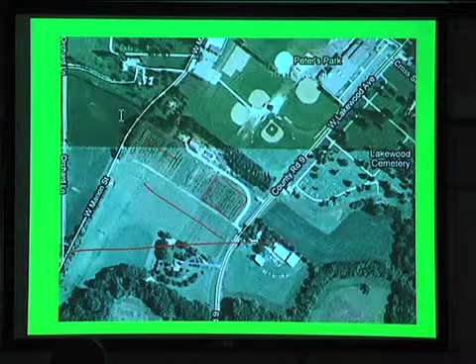Our farm - the city limits run across like this. This is what we planted, and that's what you saw in the first chart. We planted 1,000 the first year, and subsequently we've planted here and here. Some of them are just a year or two old, with their heads barely above the grass, and some now are 7-8 feet high and strutting their stuff, so to speak. I'll show you some pictures.

We built a machine shed, a shop, a root cellar, and a greenhouse - a high-end earth berm greenhouse with what we're calling seasonal thermal energy storage, using a not-so-efficient process of blowing heated air out into insulated storage. I've got a couple of schematics later to show you what we did. We didn't even have the building up yet, and I bought a tractor and some accessories - I've always been a bit of a tool freak. The building was scarcely up, and I bought a skid steer and some accessories. My wife figured out this was not about hazelnuts, this was about tools. But she adapted really well.

So the reason we got interested in hazelnuts goes back probably 30, 35 years ago. I heard a presentation about woody agriculture and how it could address some climate change problems by sequestering carbon. Rather than having annual crops, we could have woody crops that put carbon in the ground, in the root systems, and in the leaves that are dropped and processed by soil organisms.

We were on vacation, and my wife brought along a book a friend had given us. She'd already read it, hadn't said much about it. We got down to the resort and she said, 'You better read this - it'll ruin a vacation.' It's a very good book, updated since, and I recommend it to everybody. Because if you don't read this and some of the other books on a card I'll pass around later, frankly, you don't know what's going on unless you're looking beyond the broadcast media, the conventional print media, and so on - because they really don't want to deal with it, and neither do our legislators at a local, state, or federal level.

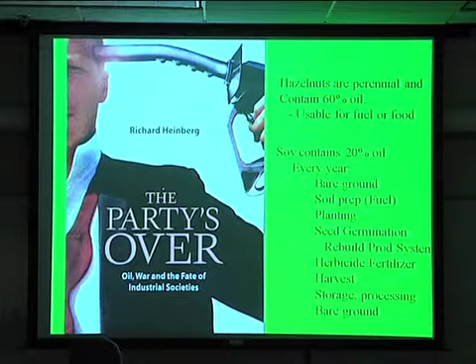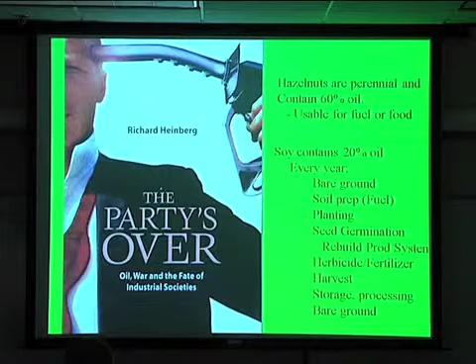So anyway, we got interested in hazelnuts because they're 60% oil and because they're perennial. It's a high value oil and high value protein, rich in nutrients. Soy only contains about 20% oil, and every year you go through a bare ground cycle—soil prepping, planting, germinating a seed, building a root system and the above ground production system, putting on fertilizers and herbicides, harvest, storage, and all that. A lot of input for 20% oil.

The thing that soy has going for it is that the genetics are really refined and everything ripens at the same time. The beans are all about the same shape. The pods are consistent for husking purposes and so on.

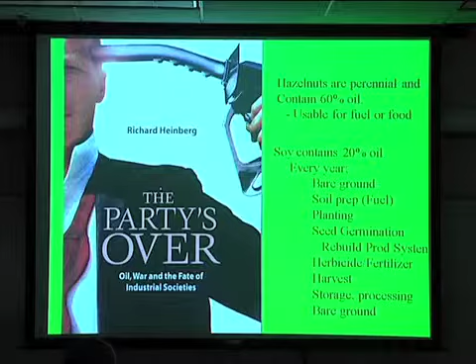Where hazelnuts have a lot of diversity, yet they grow in Minnesota. There's hazelnuts growing in Oregon that are European hazels—they flower there in December and January. They don't do real well here in Minnesota. Ours flowered this year in March because it was a little warm; ordinarily it would be early April. They are air pollinated, as you probably guessed.

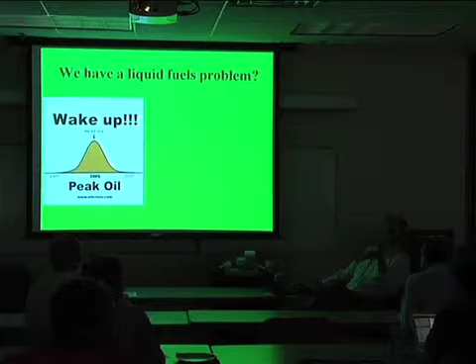Okay, so we got a liquid fuels problem. This is one of the minor digressions here. In a couple 100-year oil usage cycle, we're at about the midpoint, maybe slightly past—you could debate it, but we're at about the midpoint. The easy stuff is on the left, the more difficult, more expensive stuff is on the right. There's a reason we're 150 miles out in ultra deep water trying to get oil. It's because we're getting desperate.

And then, given some success in developing processing equipment—because there wasn't processing equipment for these nuts due to the diversity in size and shape—I developed a nut cracker that'll handle anything from a quarter-inch hazelnut up to a 1 3/4-inch black walnut, and a sizer sorter so you can sort them into size classes and then run them through the cracker based on their size class.

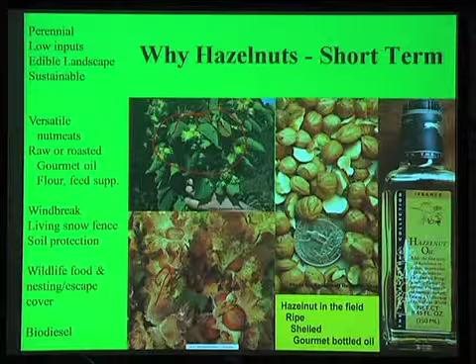The hazels are rated as a heart-healthy food by the FDA because of the high unsaturated fats. It's used in a lot of products—you may or may not have noticed, but Nescafe has a hazelnut coffee. You've seen those holiday chocolates. We have an organic chocolate French nugget that's produced up in the Twin Cities.

I sent him an email a while back. I said, basically the French should be embarrassed by French nugget having peanuts or something in it—I mean, they don't use peanuts in Europe, they use hazelnut. I told them I was going to have hazelnuts available to them later this year.

You'd get true French. Anyway, if I had 1,200 pounds of kernels sitting on a pallet, a market would be ice cream. That's the kind of quantities an ice cream maker buys for making a run of ice cream—somebody like Kemp's.

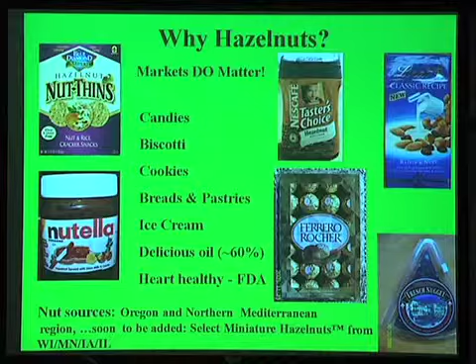There's a lot of interest. I get emails from up here in the Twin Cities from some of the restaurants, especially those interested in local foods. They would like to source hazelnuts and hazelnut oil from within the state. And so that's my objective, is to make them happy this fall.

So anyway, they can be sold in shell, or as nut meats. If you buy them in the grocery store, they're somewhere between $10 and $14 a pound, typically sold in 2-ounce or 4-ounce packets. You can find oil anywhere from 50 cents an ounce up to $7 an ounce. In fact, I just saw one that's almost $14 an ounce. It's about packaging, guys—the bottle's pretty, and some French word that most folks don't understand. They think it means it's really great.

So anyway, there's lots of possibilities for the product in pharmaceuticals. There's been some testing done of the husks. The husks protect the nut during development, and they have chemicals on them to make them unhealthy or unpalatable for insects, or for deer, for that matter. I tried biting one of those green husks last summer, and I wanted to toothbrush the inside of my mouth, the skin part, because it's really bitter, really astringent.

But anyway, there's Taxol that's been found in some of these husks. So we can see down the road that they may be grown for biochemical purposes through some genetic selection. It could be used for fuel, for mulch, for on-farm biodiesel, and so on. The biggest problem today is there isn't sufficient volume. You know, the old argument—you need a market, which has to be there first, market or product. Well, you've got to kind of grow both. And so that's where we are, in the pioneering stages, so to speak.

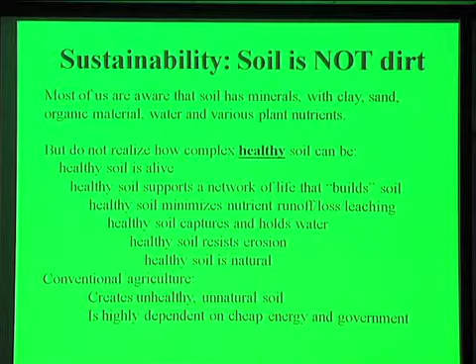It's been said for decades that modern agriculture is a process of using oil, changing oil into food. And when the energy supplies begin to go south, as they're about to go, we get food problems. Right now, grain stores worldwide are at record low levels. We're on the edge of some real problems. Folks don't know that, but probably people pick up the undercurrent of it.

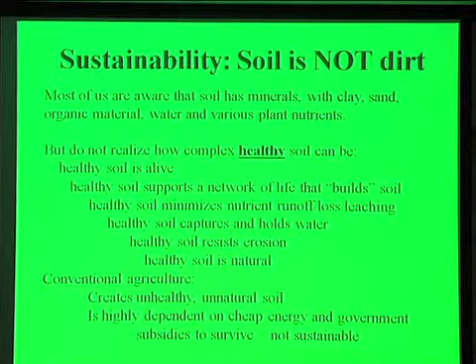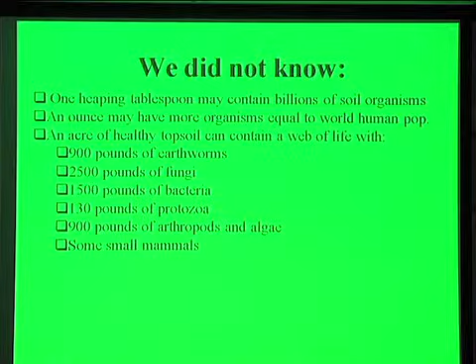It's unbelievable the number of community gardens that are firing up, gardens showing up in backyards, and garden programs at schools getting into gardening on school property. So there's lots of change in the wind, and some of it isn't explicitly about oil descent or energy descent, but it's related. These are things we didn't know about soil—an ounce of soil can have more organisms living in it than there are people on the planet at this moment. It's unbelievable what healthy soil has in it compared to the dirt that most of our crops are grown in.

And, you know, you go out in the landscape here, and most of the farmers, if they had to eat what they grow, would starve to death. Because they grow corn and beans, and it's not great corn for food, and it's not great soybeans for the table—those are industrial inputs. It's really not food per se that you'd want to serve your family.

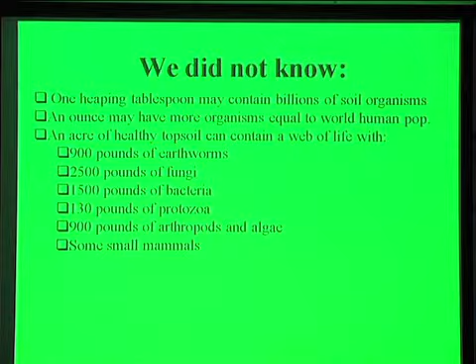So, a short history: we bought the land in 2003. We subsoiled, rototilled, and so on. We put in 1,000 seedlings in 2004, and lost about a fourth of them. We made some frantic protective efforts—fence posts in the ground in August when the ground was hard as rock—and circled it with netting to keep the deer out.

We went right through it and paid no attention to the hazels, so we pulled the stakes out the next year because it seemed like it was ultimately a waste of time. We mulched everything and ran a clean field—no deciduous seedling likes competition for water, sunlight, or moisture. So we found a local source of wood chips and mulched everything. We put in a fertilizer tablet, and hydrogel to hold moisture because we're in a floodplain, a 500-year floodplain. It's kind of a sandy loam soil.

Next year, we machine planted 3,000 tree tubelings, and there was 90-plus degree temperatures and a 15, 20 mile an hour wind, and they were scorched by sunset. A lot of them died, probably 60%.

In the next couple of years, we did replanting. We injected mycorrhizal fungi spores next to every seedling. My wife did that, gave them each a 5-second shot of a liquid with some fungal spores, because the spores attach to the roots and increase greatly the amount of contact area between the roots and the soil.

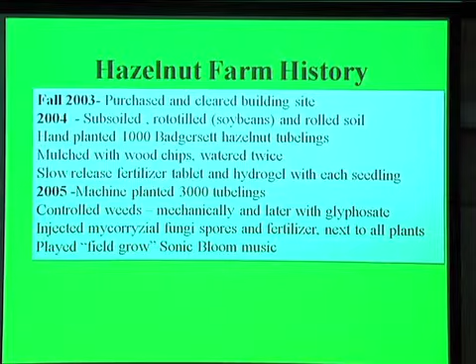We have had remarkable success with our planting, and so we get a lot of people back every year to see if it's keeping on. I'll show you some pictures of what's out there today.

We've done replacements. We decided that the soil wasn't too good and we should upgrade it, so we planted some manure crops. We tried winter rye, which didn't look like it was doing too good in the fall. When we planted it in the spring, it was kind of spotty looking, and it seemed like in the time I turned around three times, it was three foot high, turned into straw and headed out, and it was just a total mess. You've got to get it under the ground, and of course there were seedlings this high in them, which you couldn't see from the tractor. So we spent a couple of weeks cleaning that mess up.

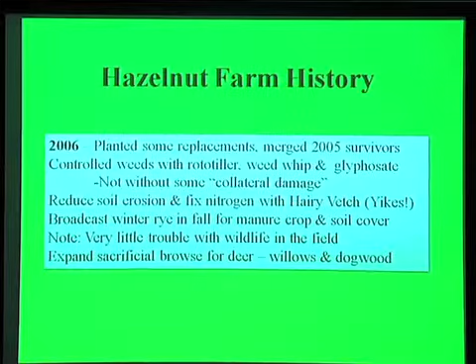We put in hairy vetch because it was recommended by a seed house. It turns out that it's no better than crown vetch, and it went right over the top of the seedlings. We're trying to shoot the hairy vetch, and it was taking out our hazelnuts as kind of collateral damage, as they say. So we had some really fun experiences, that's the fun part.

My wish is that if I had a choice about life, it would be that we'd get to live it twice, once to get the experience and then once to do it right. This is about everything that we do, the whole farm is a big experiment.

One of the things that we did was put in some willows and dogwoods, the idea being sacrificial browse, because we do know some people who, because of where their plantings are and because of some deer yarding in the area, have had a lot of problems with deer browsing, deer pruning their seedlings.

We put in some what are called Austrees, a hybrid willow that does not propagate, doesn't seed, and doesn't sucker. We just take cuttings off of them and propagate them on the property, then have a small tree planter and we're moving them out around the edge. The idea being that when the deer get to the field, they know what willows are and they know what dogwoods are, and they munch on them and get to the hazel and figure it's not food fit for a deer, because it really is not too tasty.

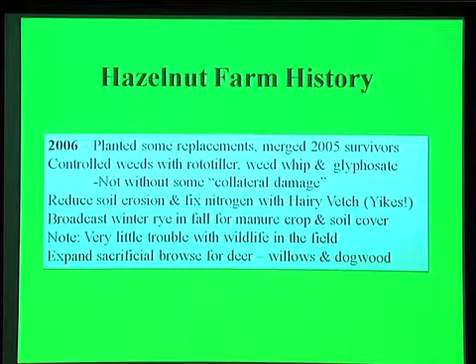In 2007, we were doing replacement work. We put up some raptor perches for hawks to sit on and hunt from. We harvested 13 pounds of nuts.

Well, this is pretty good, we didn't have to crack many. We didn't have any equipment, you know, so when you're cracking by hand, not many is good.

The next year we harvested about 125 pounds, and my best bush in the second year filled a 25-pound onion sack off the bush. The third year we picked about 900 pounds, and a lot of bushes are only this big yet. Our best bush in the third year filled a 100-pound onion sack. There's a lot of diversity in the bush sizes and in the bush production and in the cluster sizes and nut sizes. I'll show you some pictures of all that stuff in a little bit.

In 2009, we started working on the solar domestic hot water system. We put in one 4x8 panel, and I got way too much storage.

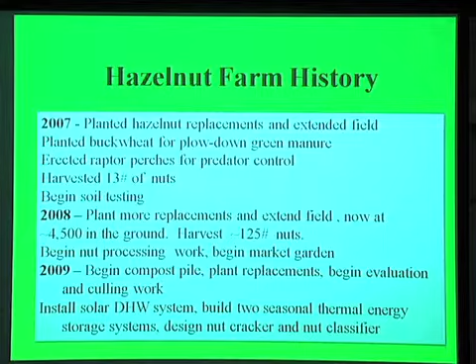I got a 120-gallon tank, but because I had it from the olden days, and I had the solar panel from the olden days, I said, well, I better use it. So I bought a little 20-watt panel and a little March DC pump and just wired them together. So when the sun shines, it collects. It's really super simple. I didn't put a controller in there. And so then in 2010, we got into developing some equipment, patent application kind of stuff.

I still have to do some wiring for the energy controls on the ventilation system for the seasonal thermal energy storage. We've done soil testing, we're doing mineral balancing. I still haven't finished the wiring in the root cellar. It's really dark in there without lights.

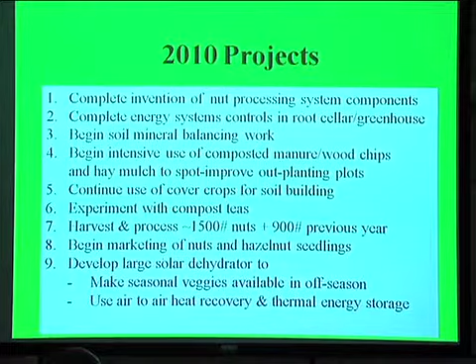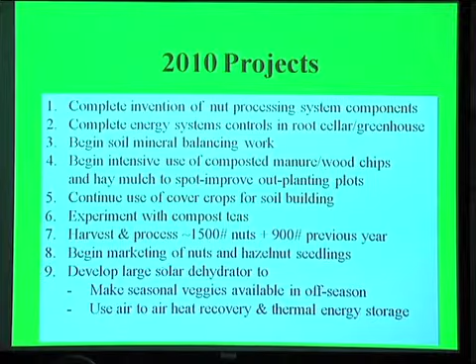And we've done composting. I'm a barn cleaner, I get free manure. It's worth it, it's good stuff. You can't believe what a difference it's made in some sandy spots fast. We're playing around with some compost teas.

I'm going to the farmer's market and selling hazelnut bushes, not many yet, because people say, well, what is a hazelnut bush to start with? Do they grow in Minnesota? People just don't know unless they're about my age. I'm pushing 70, I ate them when I was a kid. People my age remember eating them when they were kids. Kids don't remember that, and neither do their parents, frankly.

One of the projects I'm starting to feel a little pressure on is a solar dehydrator. Last year we had hundreds of pounds of tomatoes and ended up tilling a lot of them into the ground, we just couldn't keep up. So the idea of the solar dehydrator is to take seasonal foods and dry them so they're available in the off-season. We could sell them at the farmer's market during the wintertime. Dried tomatoes are really great, and there's a lot of other things that come out of the garden that can be dried.

The idea is to use an air-to-air heat exchanger that I've got in there to exhaust the high humidity air and bring in outside air, cooler, preheat it, and use the solar thermal energy storage system that's out there with 8 panels on it as a heat source. It'll heat it all, or heat it partially, I don't know yet, because it's all an experiment.

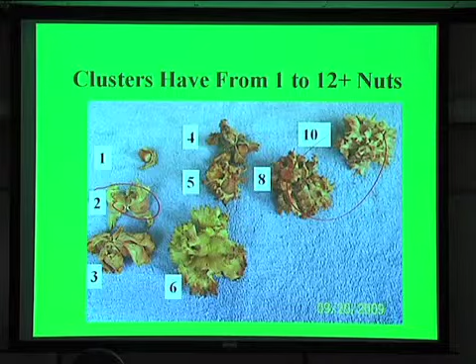Clusters can have anywhere from 1 to 12, 14 nuts. They tend to be larger nuts in the smaller cluster and smaller nuts in the larger cluster. But when you crack them out and aggregate the nut meat, the volume of nut meat is higher in the larger cluster, and the amount of oil there would be higher in the larger cluster. So to my mind, the ideal is going to be somewhere between 6 and 8. It's a pretty nice sized nut, and there's quite a lot of them in there.

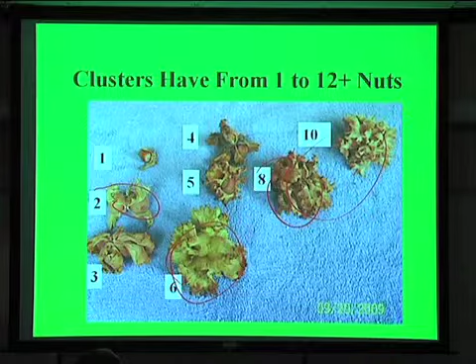I got a picture of a bush I just took the other day, I'll show you. When they're cracked out, you can see there's quite a bit of variability in the shape of the nut, the shape of the kernel, the thickness of the shell, and the uniformity of the thickness of the shell. Some of the nuts have a fairly thick coating on the nut meat, called a pellicle, and it's considered undesirable. Hazelnuts that come out of Oregon, which is the only place they're really grown commercially in this country, they blanch the nuts and tumble them to get that pellicle off, because it's sometimes a little bit bitter.

Ours, the majority of the nuts have a pellicle that's just about invisible, or it stays attached to the shell. We call these select miniature hazelnuts, and you don't even have to break them up to put them in a muffin, a bread, or a cookie. They're pre-sized off the bush. You see, we turn a disadvantage into an advantage.

We also find that some bushes produce nuts that don't fill, and those die. Every fall, when we start looking at harvest time, we go through and look at every bush, crack out 10 nuts if it looks like it might be a decent bush, and make sure they're filling.

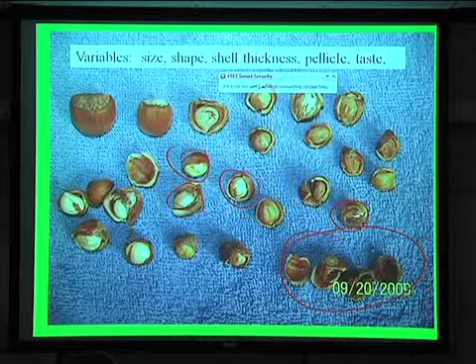And taste them to see that they're not bitter, and see what the pellicle looks like. Every year we're deleting some of them to get those genetics out of the pollen mix. So we go through later, and they're flagged with a yellow flag.

I cut their heads off, put a little herbicide on the cut stems, and we put in replacements. Yeah, we keep track of where the bushes are, what row and how many feet into the row they are. There's a lot of fiddling around.

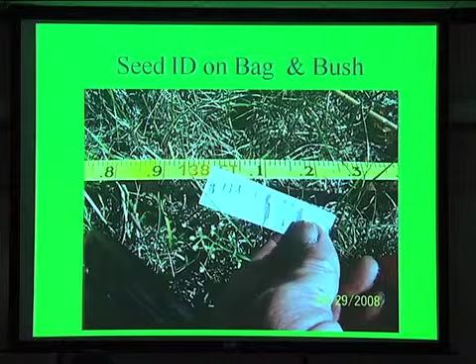And when it's flowering, as it was this year in March, there's just a little bit of pink fuzz sticking out the end. You got to get about 1 foot away to see it. And it's receptive for some weeks.

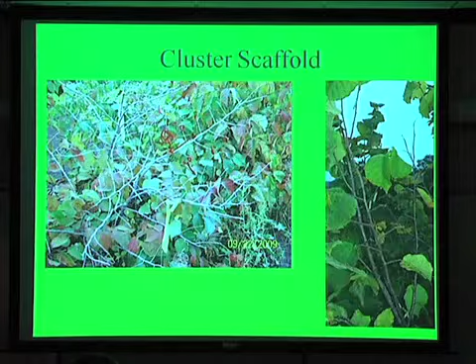They're pretty incredible. They don't all do that — some of them do that and kill themselves making the effort, and they die. If they don't come back the next year with a crop, then we really don't want them in the field. They can't do what they're out there to do. Bushes that only produce 1, 2, or 3 nut clusters think they're out there to make wood. That's not the deal, and they disappear from the landscape out there.

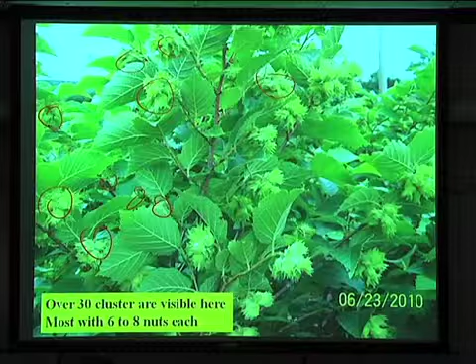Frankly, most of them are still in the shell because we didn't have the equipment. So now we've got the equipment pretty well along. I got a little tweaking to do with the sizer sorter, and then we'll submit a patent. So, you know, necessity being the mother of you know what.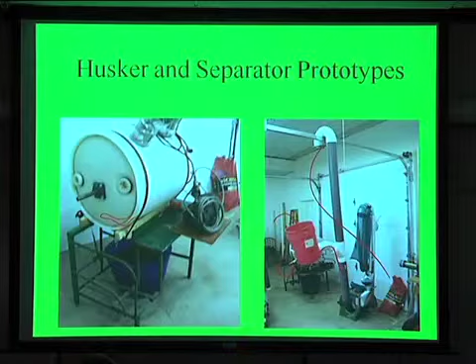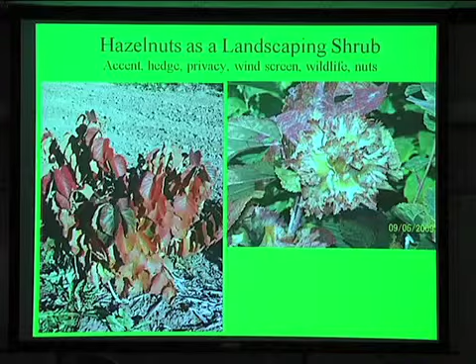This is a bush in the fall. It can be attractive in the landscape as a landscaping element. I've had a lot of tours. The garden club came last summer, and they were far more interested in the husks than they were in the nuts, as a flower arranging element. Some of them are really pretty, and they look like flowers, literally. Some of them have husks that don't quite cover the nut, and some have husks that go an inch past the nut. They have real frilly edges, and they're just a delight to look at. Who knows, they may be in your flower shop next year.

So that's the greenhouse. It's about 60 feet of glass by 16 feet deep. The actual greenhouse this way is 28 feet. It's earth bermed in the back about 6 feet, and we're in the process right now of insulating the front with a couple inches of foam. This is an old Revere panel, a 4x8 panel, and a 20-watt PV panel.

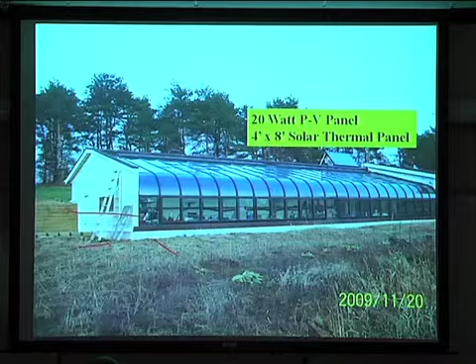Whose window product, whose glass? That was Solarium by... the name will come to me.

This happens more and more often as you get older. It'll come back. Anyway... Write some notes down so you can answer those questions. I won't forget that one. No, it's a good thing to do. My husband and I talk about it all the time. Memory enhancer, write it down. I always tell my wife, watch, I'm writing it down. She says, that does not work. You gotta use the other hand. It's write only.

Write only storage. So anyway, what we have in the greenhouse that's still not quite done is a 20-foot double-walled culvert that goes out into the storage. This is all earth under here, and there's about 300 55-gallon barrels, actually about 325, and they run the length of the greenhouse this way. This pipe, these heat exchanger tubes, are a bunch of 4-inch PVC pipes that run the length of the greenhouse. I put them out going this way just for schematic purposes, but they run the length of the greenhouse and go out of this header here, and then at the far end they turn, go down, and come back alongside the bottoms of the barrels.

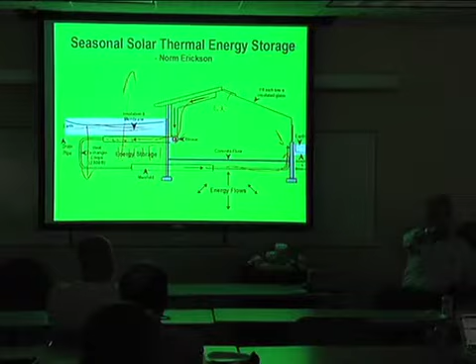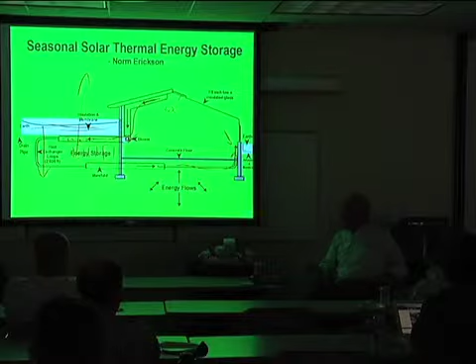So anyway, the idea here is that we've got insulation over this storage. People say, you're crazy, how can you store energy in the ground when it's 50 degrees? Well, it's only 50 degrees because it sees winter temperatures and summer temperatures, and what you're seeing is soil temperature in the well water, or 6 feet down or whatever - it just reflects the average annual ambient temperature. You ask the coal miner or these guys looking at oil coming out of this hole in the Gulf, and that stuff is hot - hundreds of degrees for oil. They're drilling now where metallurgy is becoming a problem with the drilling bits because of the heat. And the coal miners suffer from really high temperatures too in the deeper mines. So anyway, that's the idea there.

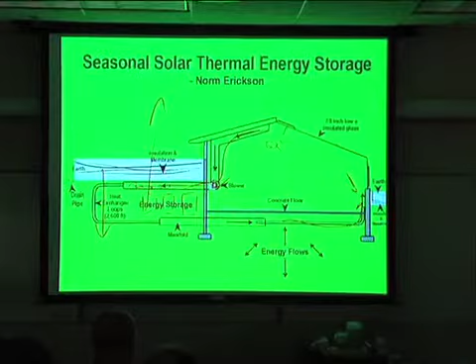Are those barrels filled? Those barrels are filled with water. They were dipped to give a little expansion space in there, and I put new bungs in them. They're all sealed and individually standing in there. I let one sit out on the ground over winter to see what would happen, and its cheeks got real big and it tipped over, but when the ice thawed, it went back to its original shape - it didn't hurt it. These are all high-density polyethylene, and they were used in a food processor. They buy their disinfectants and oxidizers and stuff like that in them. The first ones I got were 30-gallon drums from the Prairie Island nuclear plant.

I use them for lighting. No, they were listed on MnTAP. If you're familiar with MnTAP and the Materials Exchange, there's a lot of free stuff there, including these high-density barrels. I went up to Rogers one time and picked up about 60 of them. Why did you decide on 300 of them?

If I had my druthers, what I would do if I was to do it again would be to go out in the back and dig a hole behind the greenhouse and put the barrels two high, so that I don't have so much area to insulate between the ambient and the storage area, because I have pretty significant heat loss from that, even though the barrels are down 4 feet, and even though I've got a few inches of foam insulation and a couple layers of plastic to keep rainwater from perking through and stealing energy.

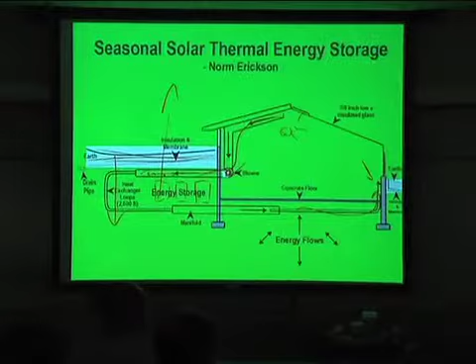So anyway, theoretically, I got energy storage under the greenhouse, behind the greenhouse, and in the bermed area, and to some lesser degree, there will be out here too.

Another question: what's your outlet temperature? It varies with storage temperature. So right now it's about 80 degrees.

So my biggest concern with this when we started was season extension. I mean, in February it can be 0 out or below, and it'll be up to 80, 85 degrees in here. So I can tuck some of that away, and I can keep the greenhouse from freezing. I can keep it easily warm enough to grow greens in there.

You can't get it to a tomato-growing kind of temperature in there, but you can grow vegetables. A lot of them are cool weather crop things. I grow cabbage in there, I could grow broccoli, I grow lettuce, other kinds of greens, chard and so on. It never freezes in there, even when the system isn't running. It is double 7/8 insulated glass.

And this is inside the greenhouse. We were laying pipes in the floor. When the air comes back under the floor, I only had, you know, 10 foot inside and 10 foot outside, because I had to header off lines here, and I headed off lines off the end. So I had to kind of split it.

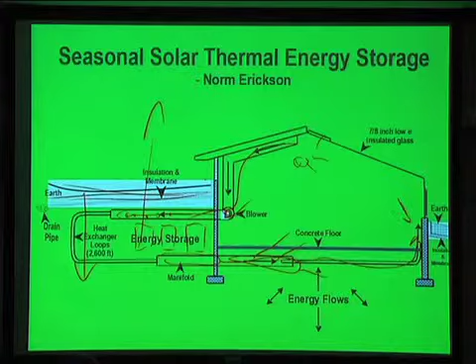So that's what you see here, on the inside of the greenhouse where we start to header off. I bring a pipe up every 6 feet. At the far end of the greenhouse over here, there's like a little apartment we built. It's about 13, 14 feet. There's a bathroom and a shower and a kitchen and a sleeping deck up above the bathroom and so on. So we go from Rochester up to the farm, and we can hang out for some days and be comfortable.

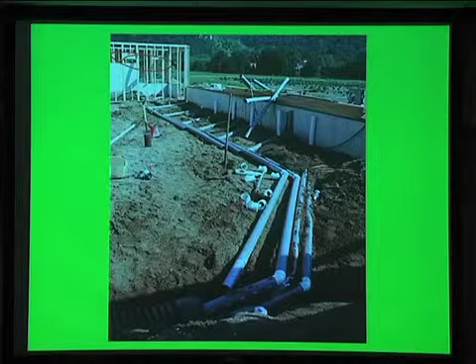There's a second energy system on the place, and these are Solar King panels that got a second life. I had them in a house in a former life. And when they re-roofed it, they got set aside, and some of them were damaged. And I did some experimenting back then too.

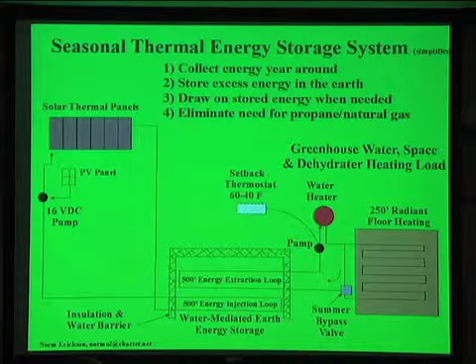These were not designed for drain back, but I tried it anyway, and I had some pillowing. If you remember the Solar King panels, they were like a waffle-looking pattern. They were glued together somehow, and then they used nitrogen high pressure to expand it. So it's an extremely efficient panel, very thick copper, and top rated. But it won't work so good in our weather with drain back.

So anyway, I had them, so we spent some time fixing them. You put them back together, it's just copper, you can fix copper. So they were soldered up and braced and so on. So that's what the solar thermal panels are. I've got 8 panels out there, and a 50-watt PV panel on it that runs a pump sitting right out there.

I've got 100 barrels here.

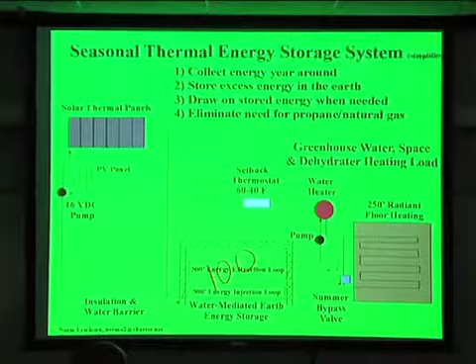Nice round number, no reason for that number. Well, I had 100 barrels.

And this is just an experiment, and it's insulated. I used to do all these calculations, but when you got weeds in the field and nuts to pick and 500 other tasks, and your wife's saying you're going to die before you finish, it's just, you do what you have to do.

So anyway, I have 500 feet of PEX, two 250-foot loops at the bottom of the barrels, and 500 feet at the top to pull some energy out. And this part I haven't done yet, except this is in the floor.

That's to kind of keep it a little more comfortable inside the apartment side. And since I got a separate panel on the water heater, this load is really going to not exist. Instead there'll be a solar dehydrator on there. So my only load on this thing is the solar dehydrator and whatever I do with the floor to make it a little more comfortable in the wintertime.

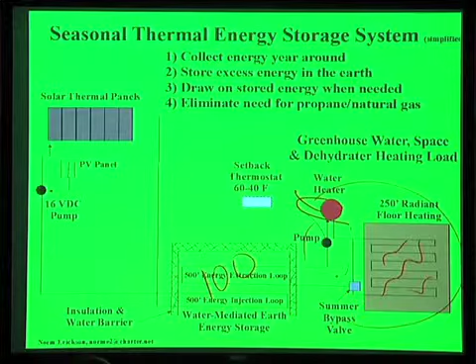So the idea then is to make seasonal food available, using minimal energy inputs. That's what we're doing with those solar panels.

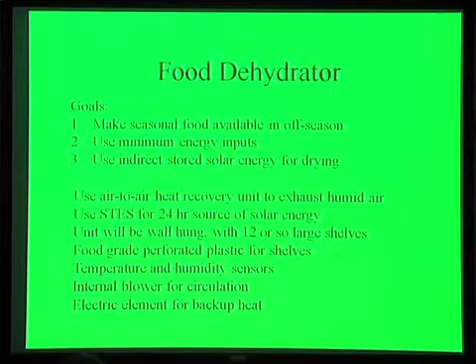Tomatoes now are about 1.25 inches in diameter, and I'm starting to feel the heat and get the dehydrator built. My biggest problem is what do I build the frames out of. I've got the material for building the shelf surfaces, but I don't quite know yet how to build the frames.

I'd like to not use wood, but I may have to. You know, some other things - you either got fastening problems or flexibility issues or whatever.

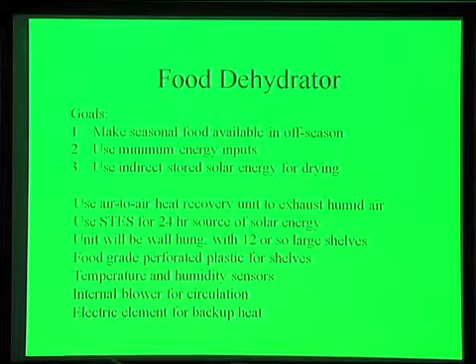So anyway, that's the array that heats 100 barrels of water, covered and insulated. And I got a little trim work to do on there to neatenize it for my aesthetics advisor.

And that's where we were. It's roughly a 10 by 10 array of barrels, and you can see here where we got 4 lines for the two 250-foot loops. I coupled them above ground, and it's a little hard to see, but they're snaked around the barrels, wrapped around like this, and snaked back and forth.

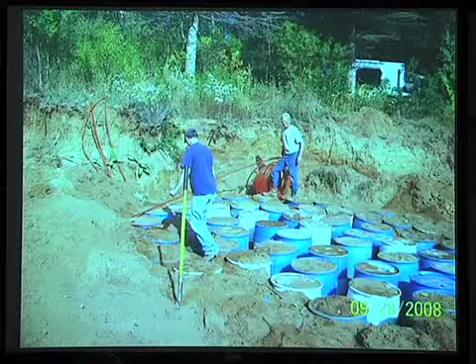On the bottom, for injecting energy, and for retrieving it, we did the same thing up at the top - 500 feet of pipe. Maybe it should have been 700, maybe 400 would have been enough. I don't know, it's an experiment.

I tried to get the university interested in getting an intern to help with the engineering, before I got into this, and they said, well, if you have $60,000, we could get you somebody for a couple of years.

I said, next? I'm just going to wing it. Well, it wasn't in my budget.

We were starting to cover it. The solar storage is out here. You can see where the pipes come up and the array is sitting in the ground here. I kept it about 30 feet away from the greenhouse, so as the temperature went up in the summer, we weren't heating the apartment side.

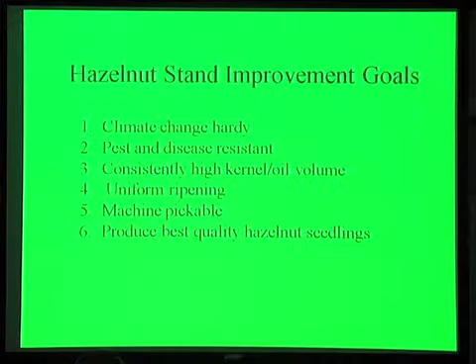So we're doing things for hazelnut stand improvement. I already mentioned that, so I don't have to beat on that. There's a number of criteria that we use for selection of who dies out there each year, so we kind of take the bottom end out.

Yeah, we have visitors and it's fun. I have some other pictures in here, the fun stuff, but I promised my wife I wouldn't show them to anybody, especially since you were going to video it. Because it's mostly funny from some distance in time, looking back - it wasn't so funny at the time.

So back to my real priority here, which is the energy descent issue. There's been a lot of papers written - Case Western Reserve has done a study, and a scientific organization commissioned by the German Parliament has issued a paper.

Doug, how soon is the trap door open here? I get just a few charts left. Should I run for it?

Yeah, thank you. So anyway, CEOs of oil companies are starting to talk about oil exploration problems, and you got ExxonMobil spending their money on stock buybacks because there's more money in that than in drilling dry holes.

People say, well, we could just raise the price of oil and uncap all those wells. You drive around California, Colorado, Texas, Oklahoma, and so on. There's capped wells all over the place, just waiting for the price to go up. Well, guess what? Between 2000 and 2008, the price went from $20 to $147. You'd guess where production went? It was flat, and it's still flat.

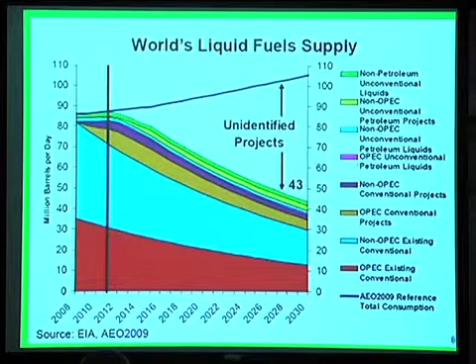This is a chart I thought you should see, from the Energy Information Administration, Annual Energy Outlook 2009. It also appears in a Pentagon report that's out on the web, the Joint Forces report. And the text in there says, unless something really extraordinary happens with investments, we could be 10 million barrels a day short by 2015. I laid a rule around there, and that's what it is. 5 years is not far from now. It's like tomorrow in terms of infrastructure and what can you do about it.

Ethanol, biodiesel is kind of a joke. It's a farm program, good for the rural folks, but it doesn't make any sense. Depending on whose numbers you believe, we could convert all of our farmland, cropland, to beans and corn, and we'd reduce our demand by somewhere between 3 and 15%. It's not the solution.

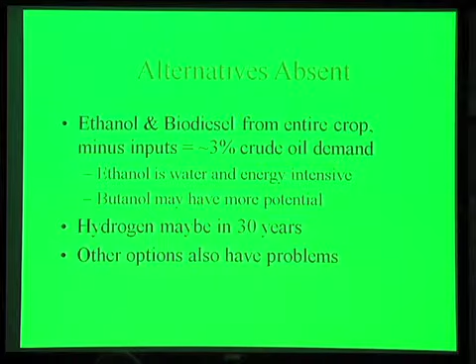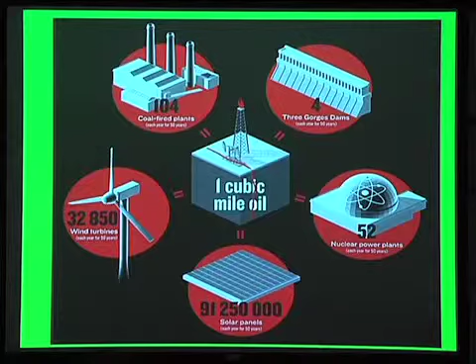50 years worth. We'd have to build 91.25 million 2 kW solar arrays and run them for 50 years, and that aggregated 50 years of energy production would equal 1 cubic mile of oil. Take a quarter of that for U.S. liquid fuels. We got a problem. We can use renewables to keep the beer cold, to keep the lights on, but we're not going to run railroads and trucks and cars the way we're running them today with renewables.

Do you know how much cubic mile of oil we need today? I don't know how much it is, and it was rounded, I'm sure. This is 1 year for the planet. You know, the U.S. today is using about 19.5 million barrels a day, between 19 and 20 million barrels a day, 42 gallons per barrel.

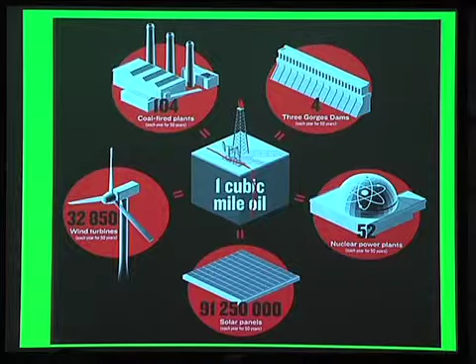So anyway, there's other sources. I won't go into those, you can find it on the web. Go to IEEE Spectrum or send me an email, I'll give you a card with my email, and I can send you this chart. So we're in trouble, we don't have replacements.

Demand is rising again, barrel of crude. This is an example used by Roscoe Bartlett, a conservative Republican from Maryland. He started the peak oil caucus in the U.S. House. He says 1 barrel of crude oil is the energy content of 12 persons' labor, 12 years for 1 person. Is that cheap or expensive? I think Sherpa weeks is a better measure because Sherpas work harder.

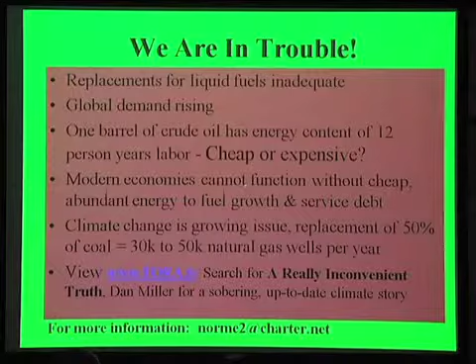Yeah, no question about it. Another example I got in another pitch is you can take 1 gallon of diesel fuel and run an 80,000 pound truck up a slight grade about, I think it's 5 miles.

One of the things I would do if I was to build it again is pre-stressed concrete, poured walls, and so on, so we can take stuff out of the greenhouse in the winter, out of the garden in the fall. We took potatoes out, the last ones were in March, and onions in April, kept over winter. And canned goods we can put in there.

So it's a refrigerator. I've got the ventilation pipe going out the back at about this height. Part of the finishing up work is to header those, so there'll be a header on one side, the header on the other side, 15 feet apart, 18 foot deep.

And I have power in there, and I'll blow air out and intake cold air. So I'll use ambient air as the refrigerant in a sense, and drive the temperature down into the low 30s is my goal, and then shut off the fan, and then energy will leak back in from below and around this thing, and then the switch will come on, and I'll blow that warm air out, and we'll bring in a fresh batch of cold air, warm it up, and so on. So we'll pump energy out of the greenhouse during the winter.

Last winter it got down to 42 without any of that ventilation, outside of what might happen from convection and wind blowing on the pipes.

You said you sell the seedlings and so forth at farmers market? In Lake City, yeah. What do you sell? You said you have both bare root and potted. The potted are 2-year, and they're about this big, and I'm selling them at $10. I sold them on Craigslist for $15.